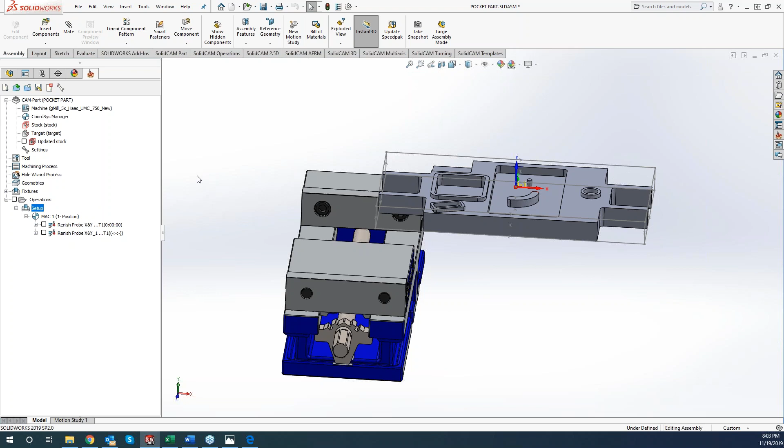But okay, so tonight we are covering everything that you guys could possibly want to know about pocketing. So we are going to go over some of the new features that are in 2019 with pocketing. We're going to cover pretty much every little option inside of pocketing that is relevant to you guys. There are some functionalities inside of pocketing that hardly ever get used. So we may still cover those, but just want to cover the stuff that you guys are going to run across most commonly when you guys are using SolidCAM and programming with pocketing.

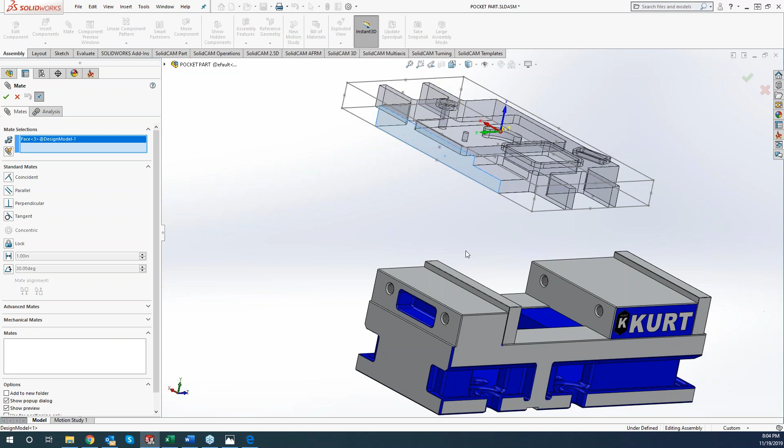So first thing I want to start off with, I did get a couple comments about setting up vises and stuff like that. So for every night class going forward, I'll just go through a quick vise setup. So in here I do have a Kurt vise, which is not mated. So I'm just going to come in here and we'll do some quick mates. And mate this to this other vise here. Go to the, whoop, I'm getting ahead of myself here. Bottom of the part to the top of the vise.

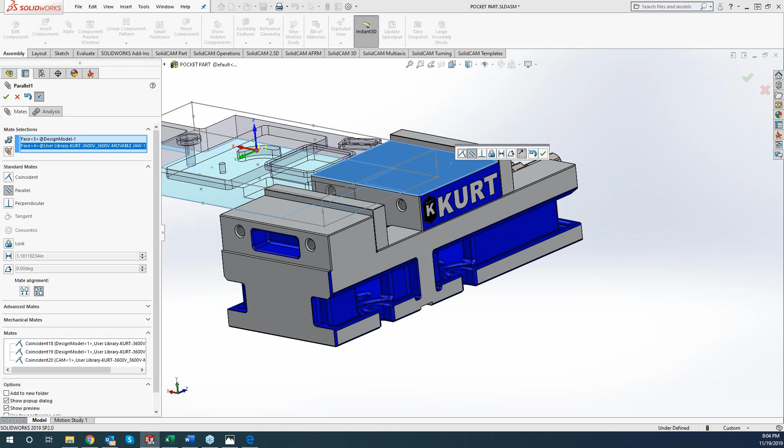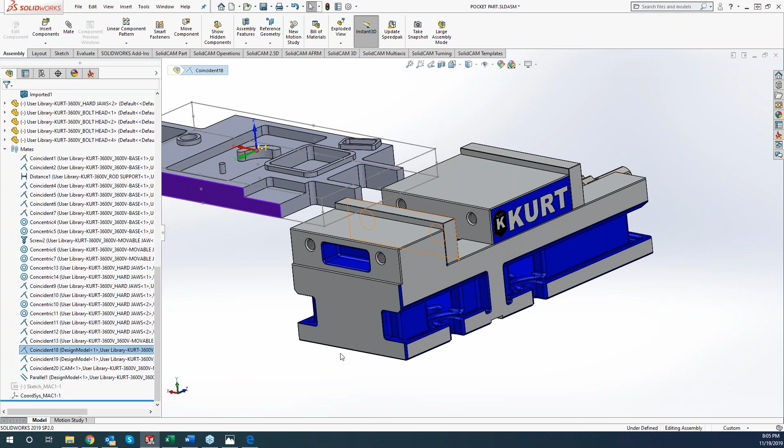Wait a minute, what do we got going on here? I'm gonna have to start all over here. Something so simple. All right, let's get back over to our mates here. Okay, got that one, that one, that one. All else fails, hit the undo button. Okay, so we'll start over here.

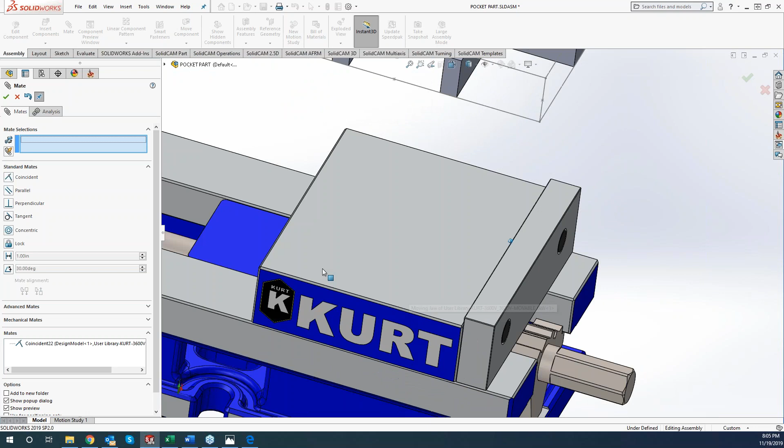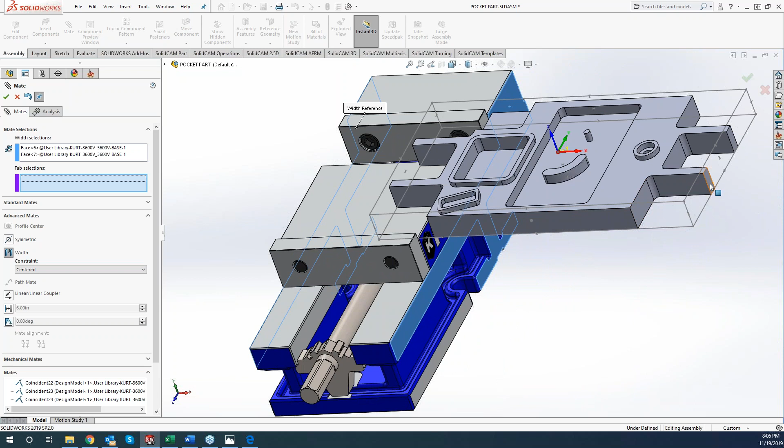So mate this face to this vise right here. And this jaw to the back of the part. We'll just set the part on that there. And we'll do a width mate to center up. Okay, there we go. So now we have our vise in there. This is completely optional for everyone, but I do like to see them in there. And by looking at everything, looks like a lot of you guys like to see those in there as well. So we got our vise in there.

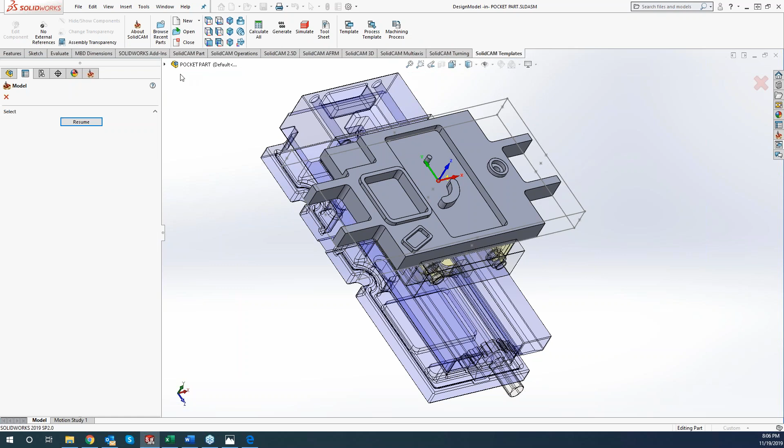Now, very first thing before we start anything is we want to get our setup going. So in our setup, it should be automatically put in there for you. So all you have to do is just double click on it. And I don't have a fixture right now, so I can just hit these little 3 buttons right here, and this will add a new vise in there. And I have several components of this vise. So what I can do is actually click on CAD selection, and then I can highlight everything to my vise here, and then just do resume. And all the components will be grabbed.

All right, so we have our vise in there. I'm gonna make sure that my vise is positioned where I want it for our machine sim. You'll see right now, I got my vise sitting into my platter, so I'll go ahead and raise this up. I'm just raising this up using my center mouse wheel. I can go in there and type a number too.

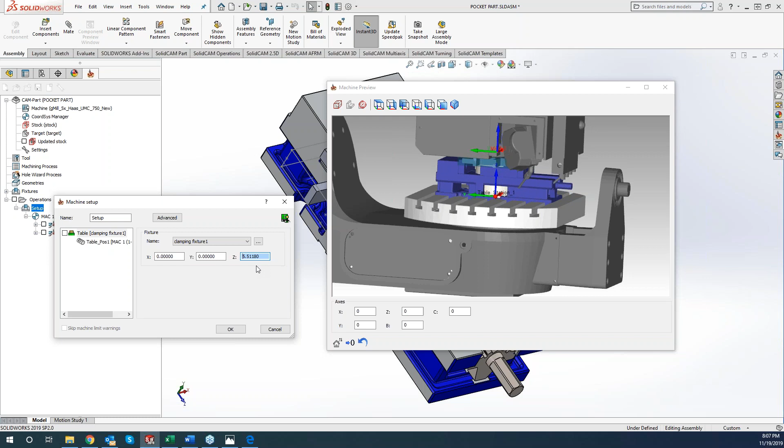Okay, so now we're good. So I got my vise in there, got it located where we want. I probed my X and Y and my Z location right here. So now we can start doing our programming. So the big things that I want to really stress with the pocketing is the smart face technology.

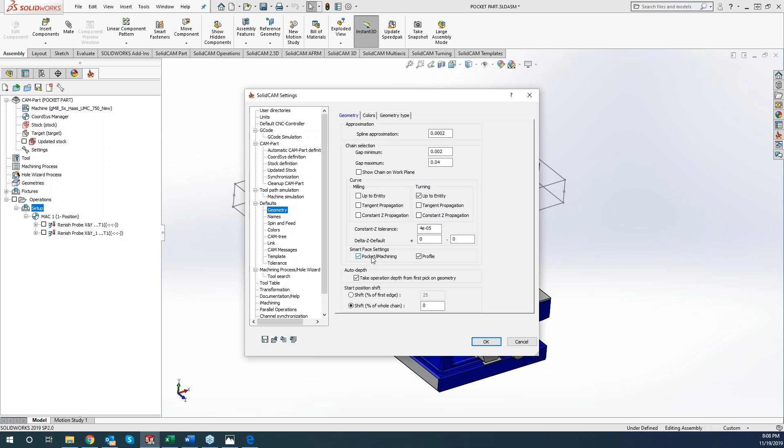Now this should be turned on by default in your settings, but if you guys want to double check, you guys can go to Tools, SolidCAM, and SolidCAM settings. And go down to geometry, and right here is the smart face settings. Make sure this is turned on for your pocketing. This will really help you out, and I'll kind of show you that here. You can do this for profile as well, but if you have that unchecked, I would definitely check it.

So on our 2.5D tab, we'll go ahead and grab our pocket. Now traditionally, I think in 2017 and older, any pockets that were set to different depths would have to be created in a separate operation. Now we have the ability to grab multiple different depths inside here. So starting at the top, we'll go with our geometry. So we want to grab new geometry, so we can hit the new piece of paper.

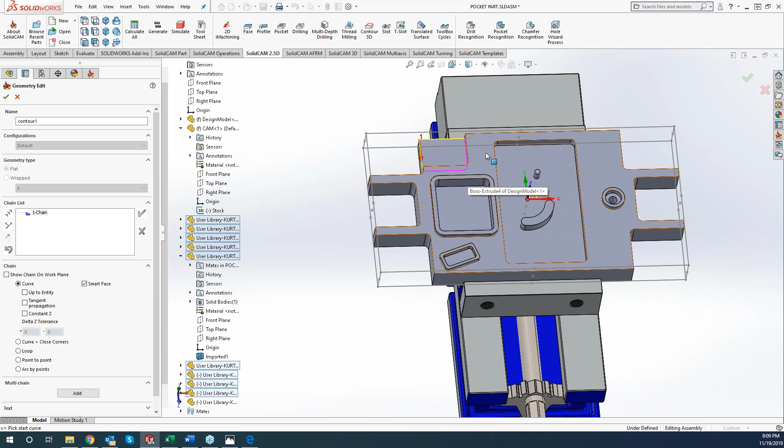And let's just say we want to pocket out this piece, and let's just do the top. And we'll use a fairly large end mill. What we'll do is it will look at anything that is open. So these outside areas right here, these open pockets, it will automatically mark those as open. But then when we have a closed pocket, like on this particular one right here, we have a semi-open. These walls are set to close, and these walls are set to open. What this is telling the software is to have the end mill approach from the outside, working its way up to this area.

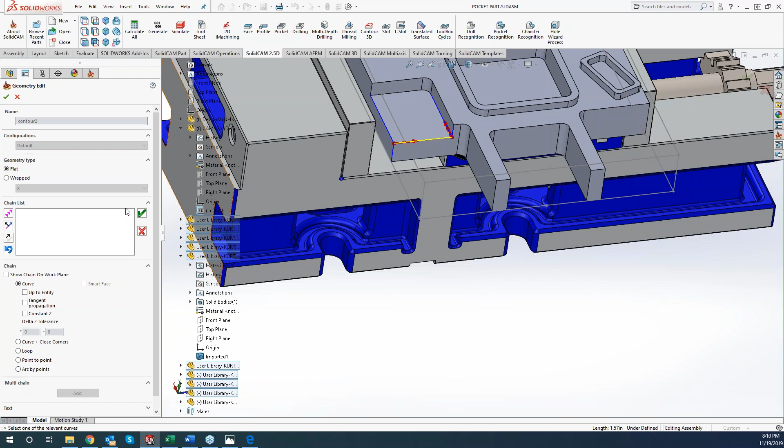So we can hit a green check mark once we're happy with our geometry. And I did forget to say that, if you don't like using the smart face or you don't want to click on the face, you guys can come in here and manually click and add chains like any other functionality that we were talking about in profile last week. So you do have the option to do that as well. Okay, so we got our geometry, and we're working on MAC 1, position 1, which is our only one in there. If you guys did have multiple you can grab the different MACs or different positions in here.

Now, we do have the option to do 3D model gouge protection. To me, I haven't had to use this much, but what you can do is you can do a 3D model gouge protection against this model, or you can actually select a different target model, possibly like a configuration inside SolidWorks. You have quite a few different options right there to do your gouge protection. And if you guys do turn that on, you will get the gouge protection offset. And what this will do is you can define a value by which the tool is moved away from the machining surface. So it's kind of like a surface offset to give you a little bit more control of your tool path.

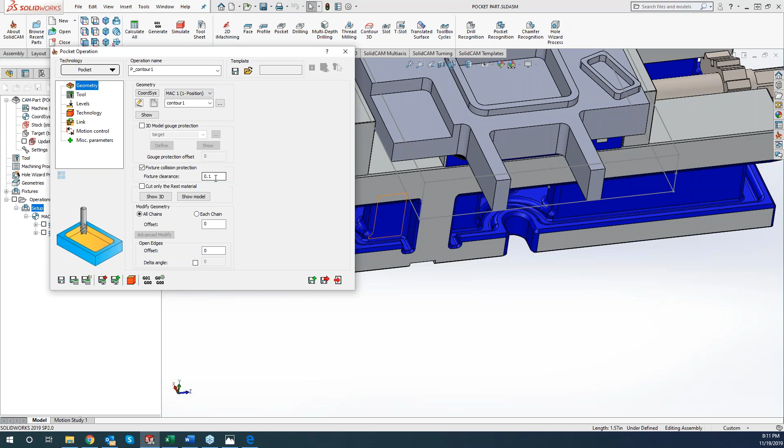Fixture protection. If you're running a fixture, you can turn this on, and what it will do is it will keep my tool path away from that fixture by 100 thou, as it sits right now. Now you can make this whatever number you'd like, but this is just if you have a fixture in the way, and not so much a fixture, if you are using toe clamps, bolts, anything like that, you can use that as a fixture, and you can do a protection against that. So really cool, really nice to have. If we were machining the outside perimeter, it will actually go and avoid this jaw on the front and the back to stay away by whatever distance that you specify there.

Cut only rest material, meaning remaining stock, which we'll cover shortly. If we have a radius of 0.2 but we're using a 1/2 inch end mill, we're still going to have some material left over in that corner. So we can turn on that cut only remaining stock or rest material option, and the next size smaller end mill will come in and nibble out those corners without running through the entire operation and cutting air.

Let's see where we're at. Modify geometry: if I want to change up my geometry, I can modify individual chains. So I can go to my advanced modify, and if I want to offset out chains or offset open edges, I can change the chain direction right here. We can come in here. Yep, that's it. So we can change offset per chain.

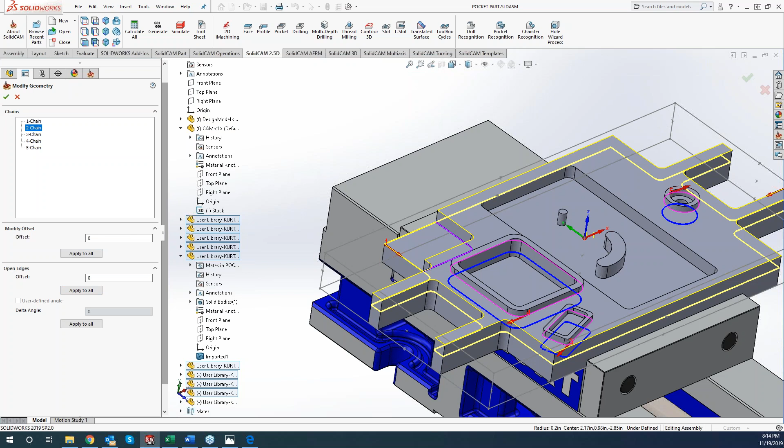And then if we do have all chains, if we do have open edges, when I have each individual chain here, my open edge offset is grayed out because I have control over each chain. But if I go to all chains, then I can just do an offset of, say, 0.1, 100 thou. So I want that toolpath to go out 100 thou past on any open edge. And then we can put a delta angle in there as well.

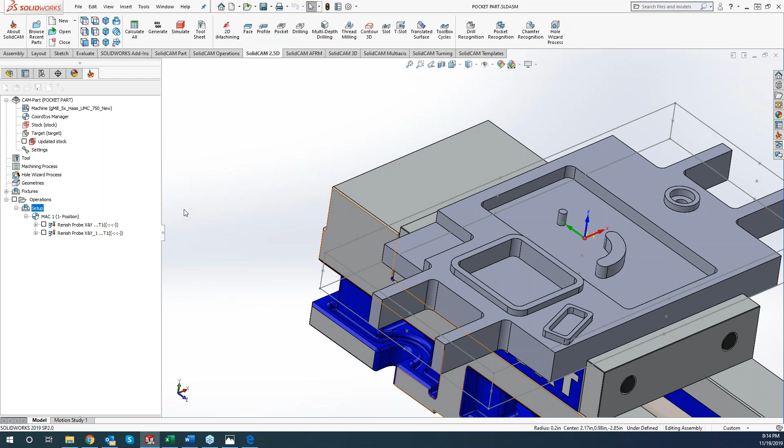Tool is kind of self-explanatory, just grabbing your tool, like what we covered in the tool library class. For this one we'll go ahead and grab... size radius. So we can grab like a 3/8 inch end mill here. Well, actually we'll go with a 1/2 inch, so we got some rest material.

And we can go ahead and throw a holder on here. Sorry guys, my holders take a second because I have so many in here. Okay, so we are running a 1/2 inch, short, and we'll have to push that up in the holder a little bit. So we'll do 1.5 -- okay, that looks a little bit more realistic.

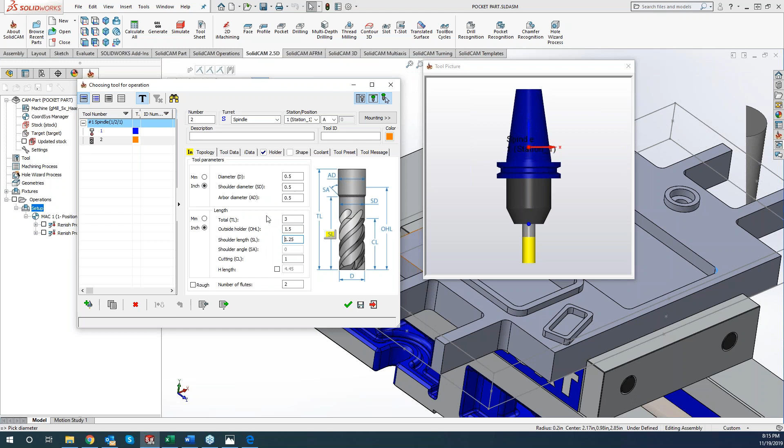Feeds and speeds are whatever you guys would like. Coolant, if you guys are using air blast or flood, sky's the limit on what you guys can do there.

Levels. Since we are running multiple different levels now, let me turn this off. So the distance from here to the top is 0.59, and then we told it we want to machine this face to this face, which is 0.2. So we have multiple different levels going on here.

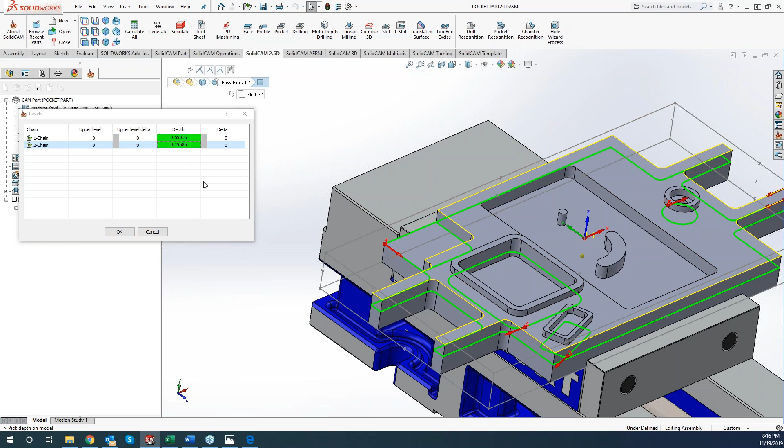In older versions of SolidCAM, you'd have to do this as individual operations, but now we have variable level. So I can click on variable level, and my chain 1 is right here -- I click on that and make it associative by turning it green. Chain 2 is going to be this level right here, at 196. We hit OK, and now it will automatically go down to that level for that geometry, and this level for this one. Now if I'd like, I can set up step downs. If you want to take it all in one cut, just put this right at 0, and it will take it all in one cut.

Now, technology -- like I've said with profile, this is kind of where the guts of everything are. So how would you like your toolpath to look? We have a couple different options for pocketing: we can do a contour, we can do hatch, which is kind of like a zigzag pattern, we can do hatch plus finish, and we can do a plunging pattern. The plunging pattern works really good for any materials, but especially harder materials, since we can always drill faster than we can machine or side mill.

If you have a spade drill or something like that, we can plunge through and get the bulk of the material out, then come in and do a profile operation. So you do have that option right there.

For this particular one, we'll go ahead and do a contour. Now when I pick my technology, as soon as I click on contour, it will automatically open up the contour tab. If I switch over to hatch, this tab will automatically switch over to hatch. So keep an eye on that, it will stay contained to what you're looking for.

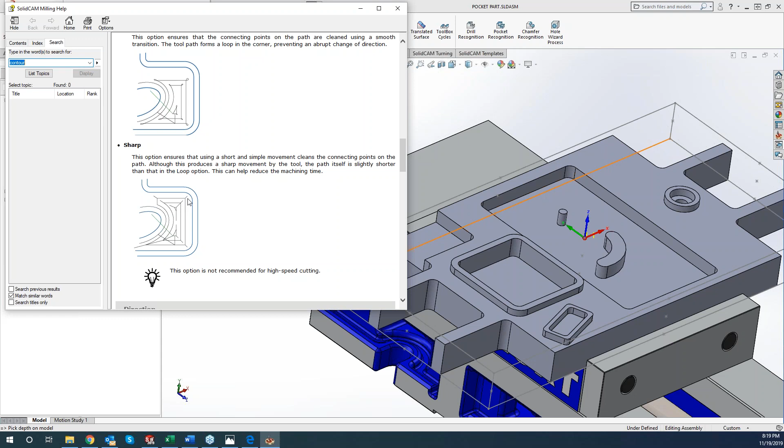Let me see if I can get a bigger picture for everyone. So we've got loops right here, which does little looping circles. And then we also have sharp, so it will come in there and do a real sharp edge, or we can set it to none and it will just follow the contour of the geometry itself. For this particular one, we'll just do none.

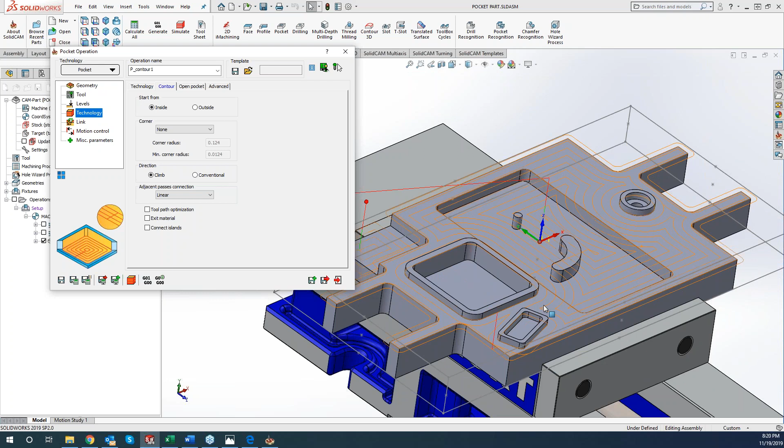Climb cut, conventional cut, and then adjacent passes. So when it goes to step over, let me just save and calculate this, and I'll show you what I'm getting at here. Our connections right here - as we move over to expand our pocket out, how do we want it to go to the next step over?

Do we want to do a linear? We can set it to smooth, so we'll do like a little S pattern in here, which will give you a bit of a smoother finish and look. Or do we want to do a rounded? Let's calculate - this will do a little bit smaller of an S pattern going in here.

So, any questions so far? Are we looking good, guys? Okay, nothing in the questions panel right now. Am I missing anything, Greg? I think towards the end I'm going to want you to circle back on something, but we'll continue with the flow for now. That always scares me.

Toolpath optimization will only work for specific operations. It will avoid doing tool plunges on stock when finishing, avoid uncontrolled tool load when cutting in corners, and also eliminate air cutting when working in tight corners or tight areas. You can have this turned on by default to eliminate all those issues and help optimize your toolpath a little bit.

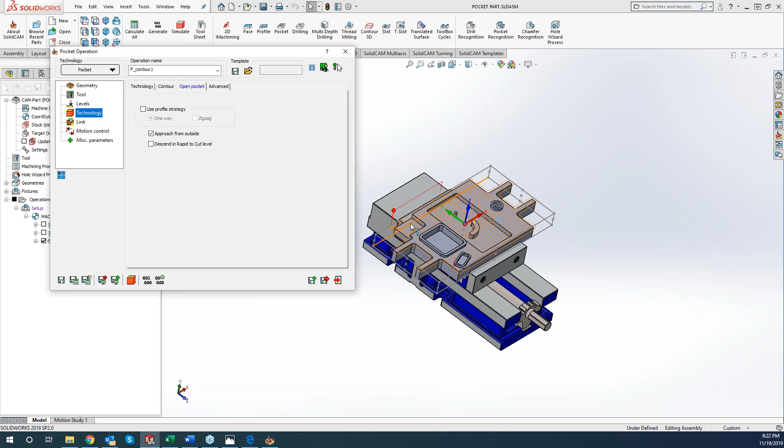Now on this top, it's an open pocket, so it's still going to approach from outside, which is what we're looking for here. Now if we're coming into a blind pocket like this one right here, we'll do a helical entry.

And then the profile strategy, you can turn this on to set up to do one way or zigzag. The Advanced tab is kind of the same thing as what we went through in profile - we can set up different sorting, set up final cuts, do wall drafts, and do trochoidal cutting in there as well.

And then the plunge cutting - for some reason they have plunge in here and in the technology section. So if you guys are looking to do plunge milling, just come over to the technology section.

Okay, now on the main technology section page, we've got contour. We specified how everything we want to be with our contour. This is how much we're going to overlap on our end mill, so we're doing 50% overlap. We're not doing any rest material. We're leaving 0 on the wall, 0 on the floor, and 0 as an island, so it's going to basically machine it right up to size.

Now, if you're looking for a really tight tolerance, what we can do is set up a 5 thou wall offset, and we can tell it that we would like to finish the wall. Do we want to do one finish pass, or we can do 2 finish passes, also called a spring pass? So you do have that option right there.

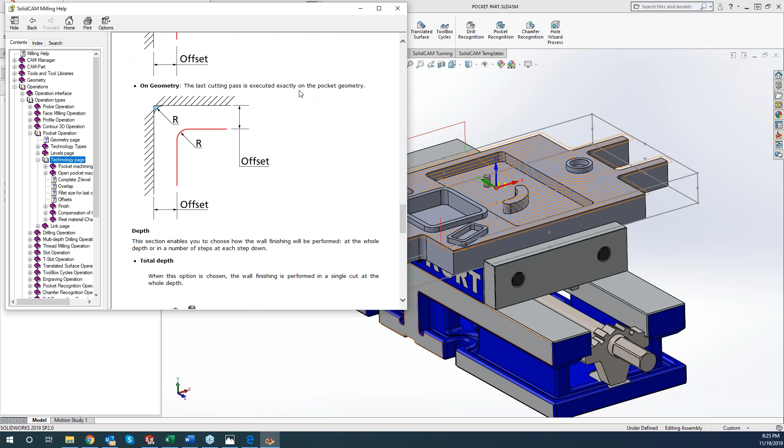So if we use the offset feature, it will stay farther away from that sharp corner, versus if we did on geometry, it would go right up to the radius there. It's not one I've actually ever used, but the option is there for you.

Now, depth type. If we have multiple pockets that are requiring roughing and finishing, what we can do is tell it to finish to total depth. So the depth, let me start over - do we want to do a finish pass on the total depth, or if we are doing step downs, it will finish each step down as it goes through.

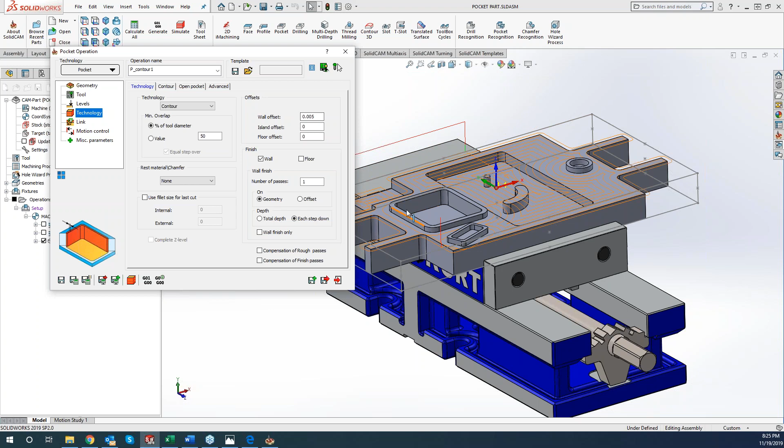So like right here, we have a 5 thou wall offset, and if we were doing step downs of like 100 thou, it would rough it that 100 thou down, leaving the wall offset on there, and then do its finish pass. Then it would move down to the next level, finish that roughing pass, and then take that one last finish final cut. So you do have that option there.

If you're looking just to do a wall finish only, you do have that option right here. And then do we want to turn cutter comp on for our roughing passes or our finishing passes as well?

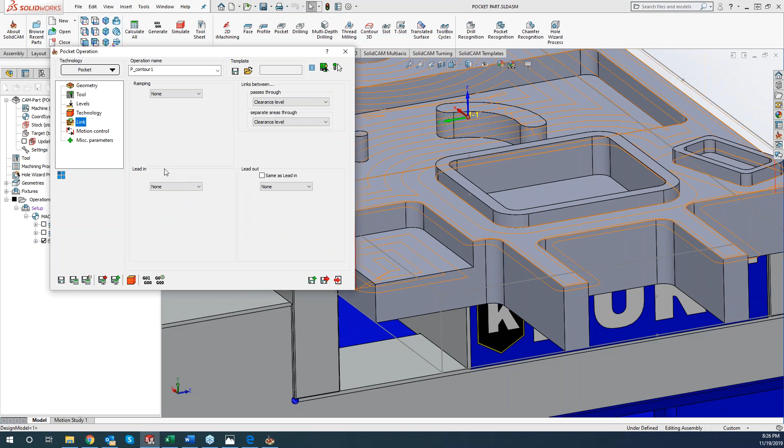All right, in the link section, how do we want to come into that material? So right now, since we have both of these as an open pocket or a semi-open pocket, it's starting from the outside. So I'm not really too concerned about ramping into the material, but once we get into this blind hole, we'll choose some different options.

And then, of course, you guys have the lead in and lead out right here if you would like to add an arc into the material. But like I said, since we're cutting with an open pocket, it's starting from the outside and working its way in. Now, if you guys are using cutter comp, you will definitely want to have that lead in turned on to have enough time for the machine to turn on your cutter comp.

If you don't, you may get the alarm on your machine where it doesn't have enough room to turn on cutter comp or an arc fitting. Greg, what's the error that we're getting on the controller?

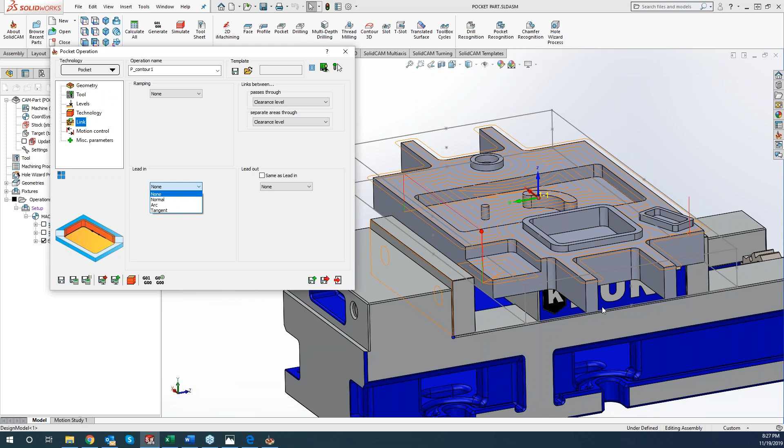The errors are different from machine to machine, but essentially you want to come in on a linear move as opposed to an arcing move. So just keep an eye on how that tool is entering that pocket. As we can see on the screen here, both operations look to be coming in on a linear move, so it wouldn't be that big of a deal.

But if you do find yourself, let's say, helically ramping in or arcing into those pockets, just make sure you have a little bit of a linear move beforehand to get that cutter comp on, right? Yep. Okay, links between passes - if we, in between passes, are just kind of doing a single line geometry, do I want it to come up to the clearance level?

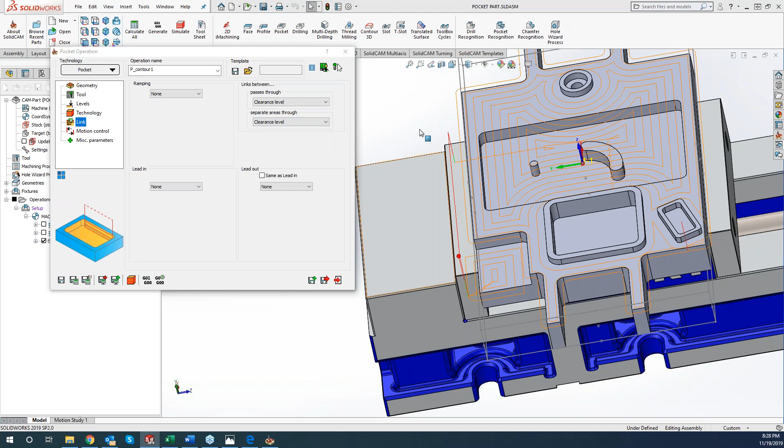We have safety distance from upper level, safety distance from current toolpath, and the level of the current toolpath. So if you guys are going through passes, you have the option right there to change up how high your tool goes up. And then to separate areas, so when we're going from this pocket region over to this one, right now it's set to clearance. So as I move this around, you'll see from this back pocket to this top, it's coming up to the clearance level.

So if we want to change it up to the safety, save and calculate, it's only going to go up my safety distance, which is my 78 thou. So if you want to save a little bit of time, not going all the way up, but just make sure you're not going to wipe out any fixtures or toe clamps. It has been done before.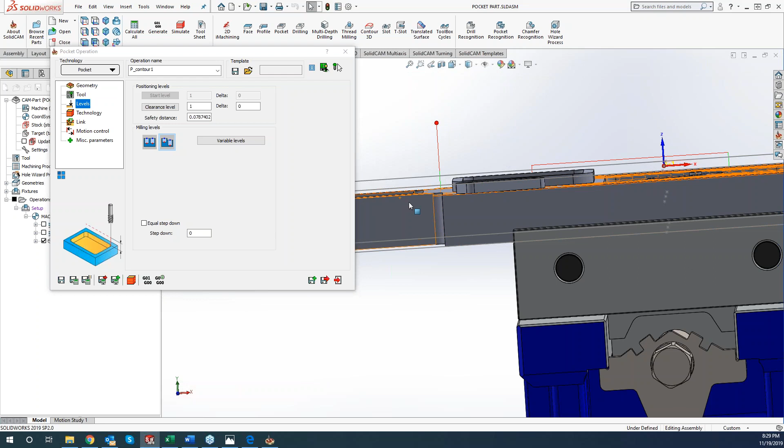Hey, Kevin. Ronnie had a question about on what move does the cutter comp turn on for these pocketing passes? Ooh, actually, did I even turn on cutter comp? Turn this on. So to answer Ronnie's question, if you're turning cutter comp on for the roughing passes, it's going to be the first move after the rapid. If you're turning it on for the finish pass, then you're going to get all the pocketing moves. And then when it comes in for that first initial pass for the finishing pass, it's going to come in on the first move of that finish pass. That's why it's imperative to have a linear move for those first passes.

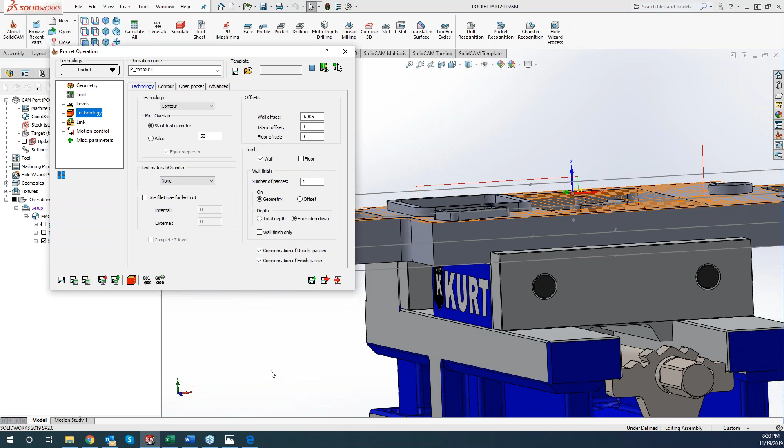And for some reason, I cannot give you a G-code right now, Ronnie, to show you. It's like my notepad died. Note to self, don't let Windows do an update before a night class starts. My Skype died out on me, and now my notepad died out on me. Okay. Oh, sorry, Ronnie, I can show you in the actual. Ronnie, did that answer your question? He's still processing it, so I think we'll move on for right now. We can circle back if he still has questions.

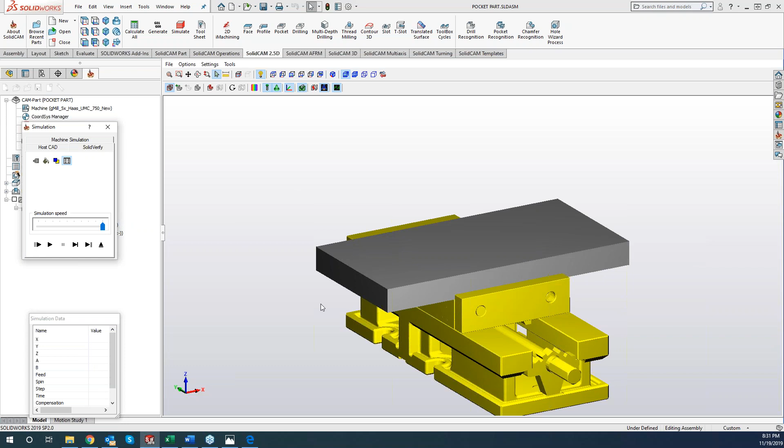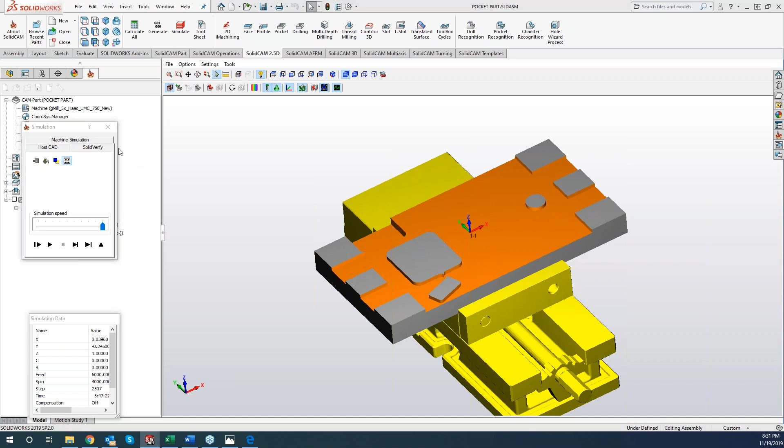And I'm going to switch over to SolidVerify so we can just kind of see what we've done so far. Okay, so since we have our fixture set up in here, our fixture showing, if we go and hit the play button here, we can see exactly what's going on. So what it did is, something I can't rotate here. There we go. So what it did is came in there and machined everything off. Now, normally we would already profile the outside out. So let me just switch this up real quick.

This is kind of a good example because I know a lot of people don't use the stock, the extruded boundary, very often. So we'll go ahead and just grab extruded boundary. And then when it's looking for extruded boundary, all you have to do is just chain the outside of your part. And this will treat it as an extrusion, per se. Now we'll go to simulate.

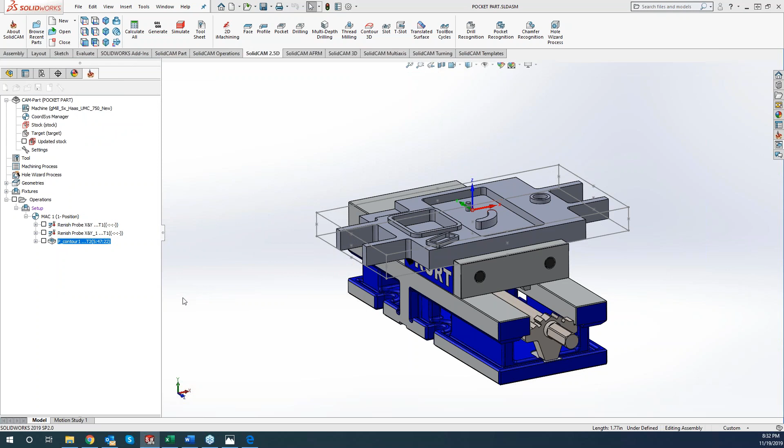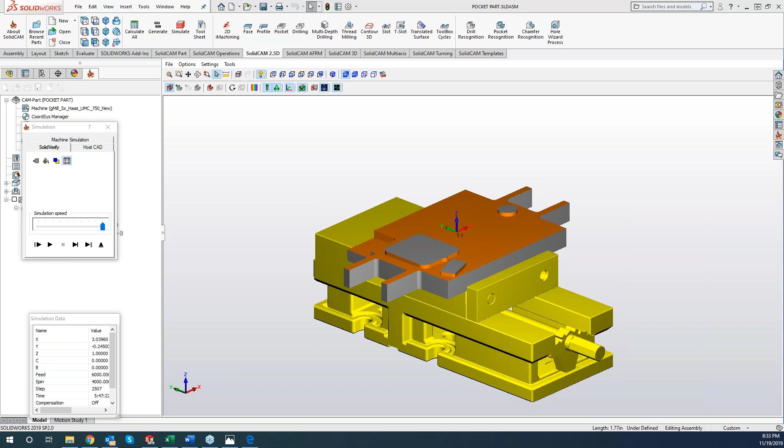Okay, it looks like what Ronnie was wanting clarification on was the type of motion that the compensation's turned on. We didn't clarify whether that was going to be a G00 move or a G01 move. That's going to be on the initial non-rapid move. So it can be turned on the G01, a G02, or a G03. You want it to turn on the G01. That's why it's imperative that we have that linear move in the beginning, because you don't want it turning on during an arc move. Awesome. Did a way better explanation than I could have on that one. With Ronnie's help.

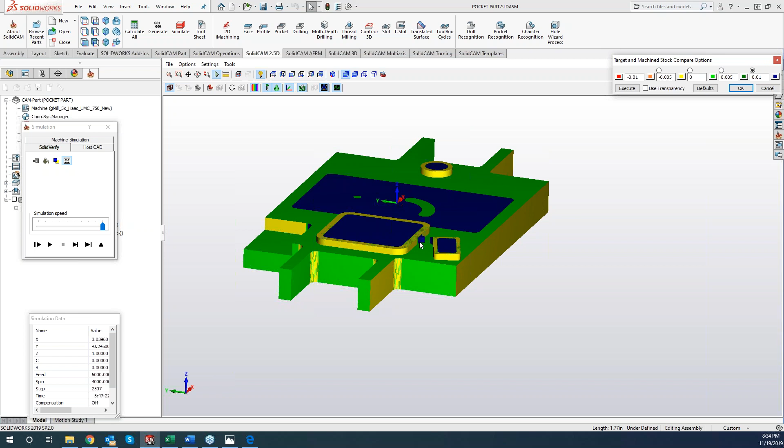Okay, so I ran it through and we cleared off all our material up there. We can do a stock target comparison, and basically anything that is green, we're up to size. Looks like I need to do a floor finish on here because I still have some material on my floor. And looks like my 1/2-inch end mill cannot fit through here, as well as on my corner right here, I still have material. So what we can do is tell it to finish off the floor, save and calculate, put an offset in here.

And now what I'll do is I'll make an exact copy of what I just did, and I can switch this right over to rest. My previous tool was a 1/2-inch, and I'll switch this over to a 1/4-inch.

Save and calculate. And now you'll see that 1/4-inch end mill is just coming in here and cleaning up the corners that were left out. So I had this area that was left over, as well as that area where that 1/2-inch end mill could not get through. So that's very simple on how to do the rest material there. Any questions with the rest material?

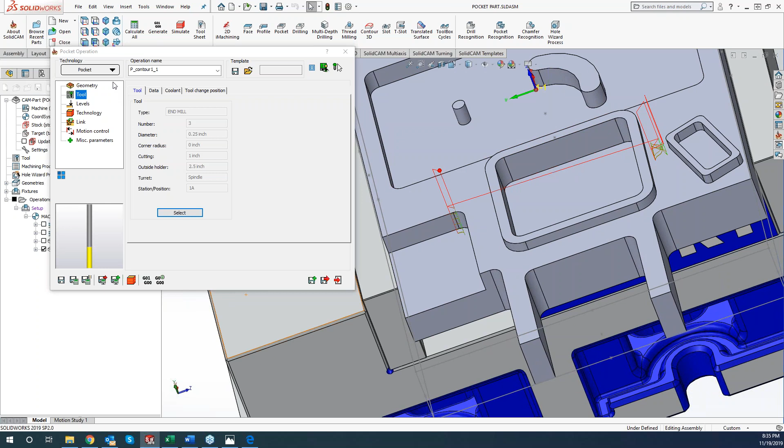Now, one thing I did forget to tell you is with the pocketing operation, new in 2019, they've added in multi-tool. So what we can do is do a multi-tool, and what I'll do is let me just delete out that second operation. We'll go back to our 1/2 inch one. And if I switch this over to multi-tool, I can tell it that, all right, I want a 1/2 inch tool in there, and I want it to finish the wall and the floor, and I would like to add a 1/4 inch in here as well.

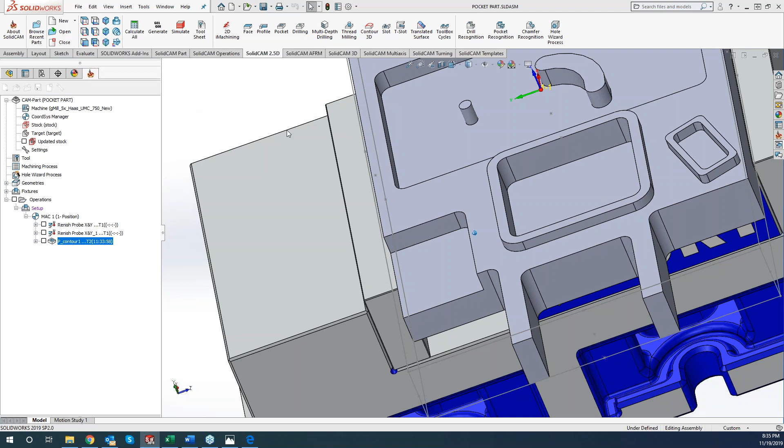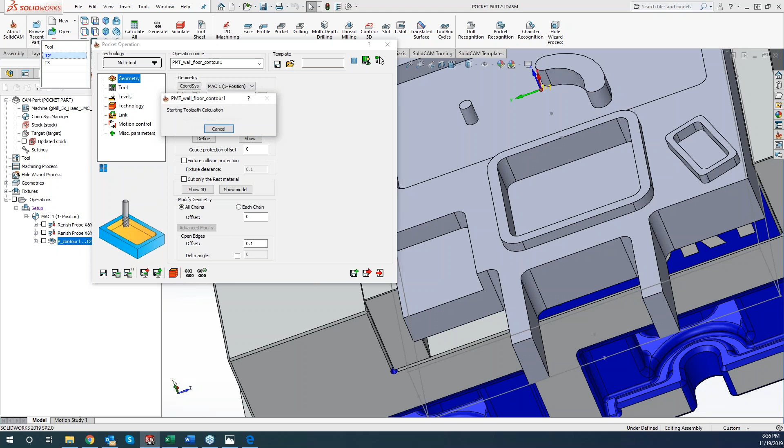And then I also want it to finish the floor and the wall there. So now, this is where we could go to our, where's my rest material? Cut only rest, save and calculate. And what it will do is it will machine it out with that 1/2 inch, and then it's going to look at the updated stock and then come back with that 1/4 inch end mill and clean out those same areas. So with this new multi-tool function here, it saved you a step of making a copy and then changing out to that smaller tool, where now you can do it all within one operation.

Now, if you want to go back between the two tools, you can just come up here, and this will give you tool number 2. This will give you tool number 3. Now, these tool number 2 and tool number 3 are actually the operation. So for my tool number 2, it created an operation right here for my 1/2 inch, and my tool number 3, it created an operation right here. So if you want to go back and forth really quickly without having to exit out of your pocket operation dialog, you can just come over here and change up the parameters.

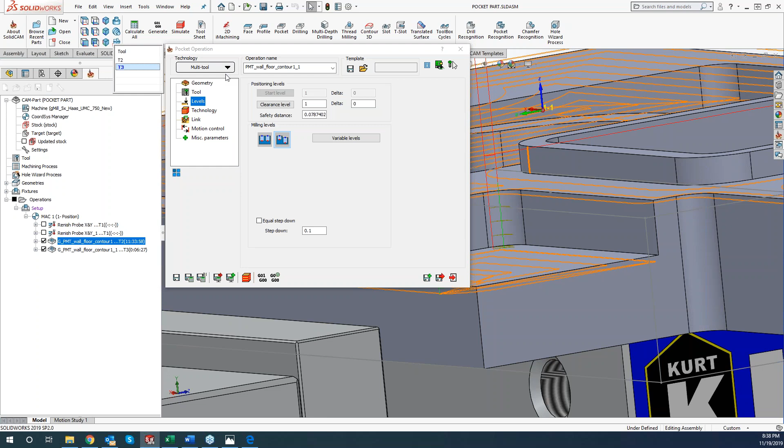So maybe with my 1/4 inch, we're running some harder material. I can't take a step down all at once. I can only do a smaller step down of 100 thou. So now if I save and calculate, we can go in here, and you can see my 100 thou step downs with my nice green puke color toolpath right there. So any questions with the rest material or using the multi-tool function? Multi-tool has really helped out a lot, making it simpler and easier for everyone, at least from what we've heard back.

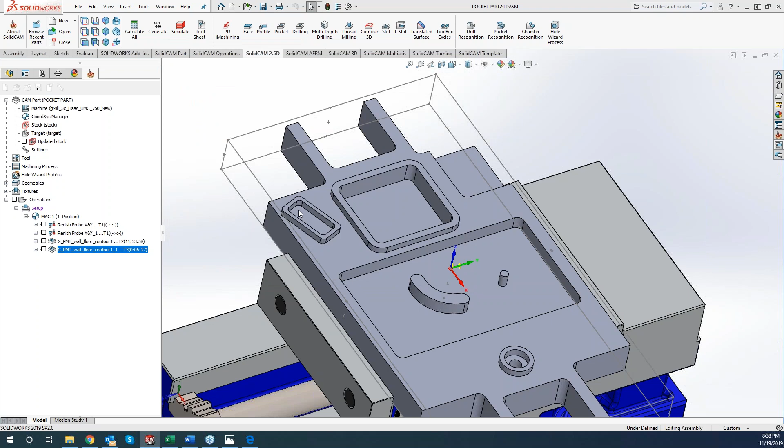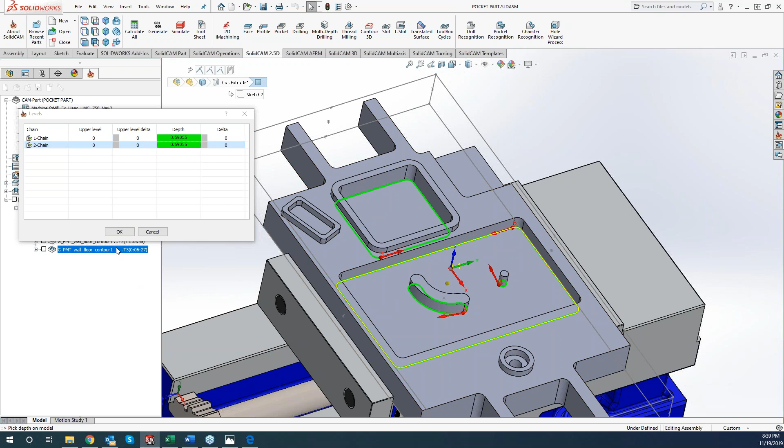Okay, so we got an inside pocket right here. So we can go ahead and do a pocket. Geometry, and I want to machine out this and this one. So you'll see by doing the smart face, it automatically recognized that these were islands, and we're going to machine around those islands. So I can come in here, and we'll go ahead and grab that 1/4 inch end mill. And levels, like we talked about before. So we can go to the variable level. 0.3, and this one is, oh, they're both at the same level, so I don't have to worry about it. So now, if I want to take it all in one cut, we can just put 0 in there, and we'll use a contour. But now, since I'm coming into a pocket without a semi-open or open face, I have a couple ramping options.

Sorry, everyone. I did on-site training all day, and now I can't talk anymore.

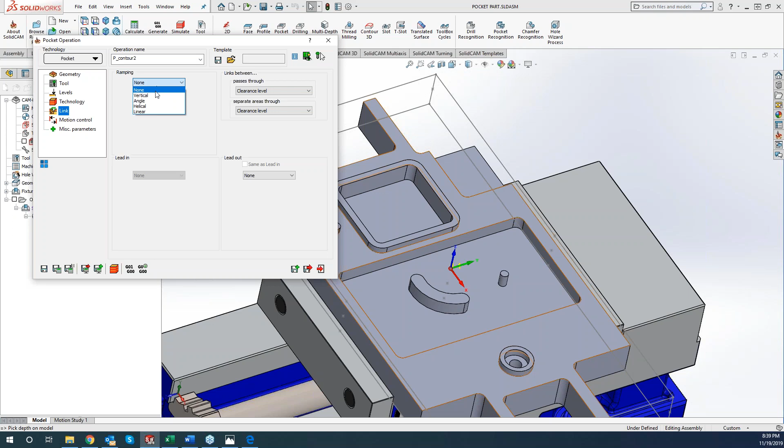Several different ramping options here. So I can do a vertical, which is basically just kind of straight up and down. I can set a point where I'd like it to vertically kind of go down. You can set it up as an angle, and we can specify how many degree angle that we want it to go, and also along with the start points. Helical, which is kind of my go-to. So it's going to do a helical entry going into there, and a linear zigzag as well. So I'm going to set it to my favorite, helical, and go ahead and save and calculate.

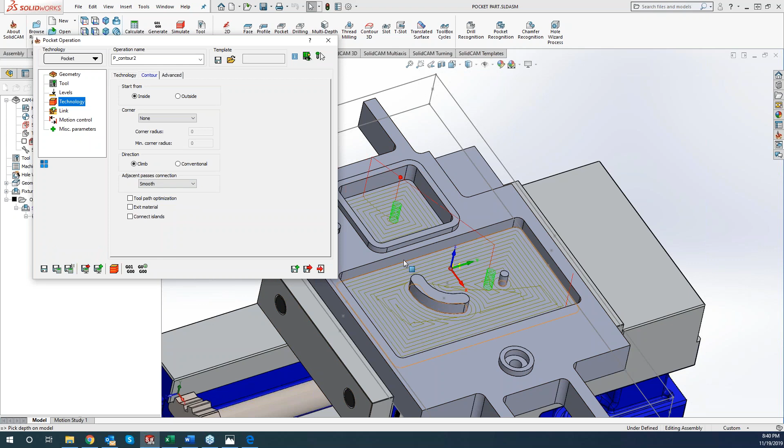So we can see that it's doing a nice helical entry coming into there, and then it starts its pocketing operation, working its way out. Now, if we're trying to smooth out things a little bit, we can go to our contour and we can set our connections to smooth, so it kind of smooths out our connection passes. If I zoom in here, got nice little connections going on right there, so the machine's not jerking. But that is a closed pocket right there.

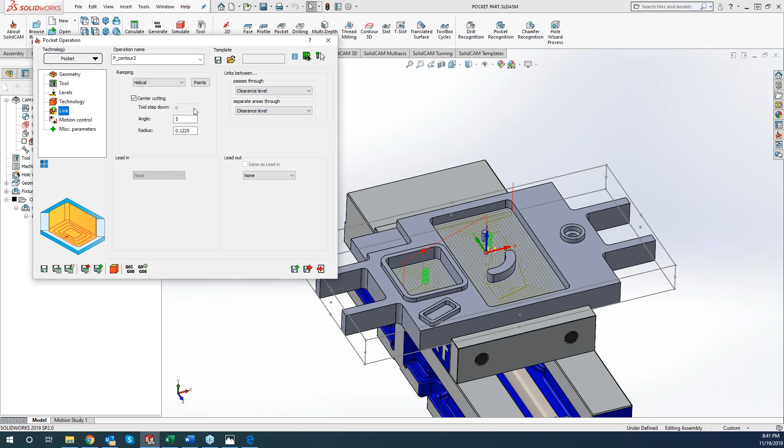Any questions with the closed pocket? Hey, Kevin, can you change the linking features, the ramping, and just show visually what each one is going to do? Sure. Kind of go through the vertical. Let's go through the angle. So let's kind of get zoomed in here.

So helical, we can see. Let's do linear. So instead of doing a helical, we're doing a zigzag pattern, working our way down, so we can set that angle and the length of the zig or the zag, however you want to say it.

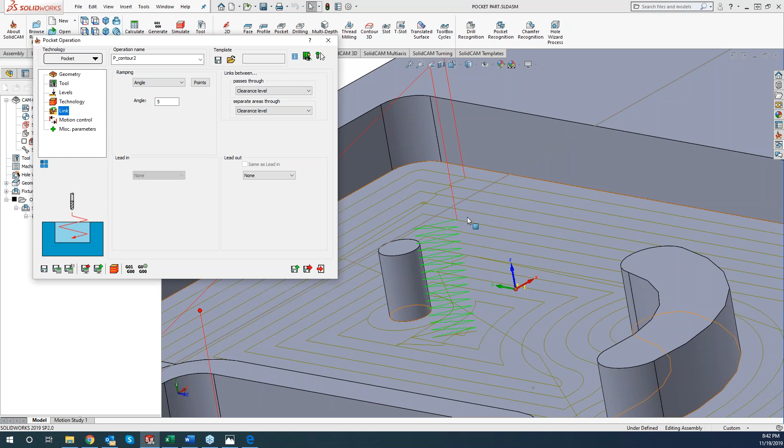Then we can go to angle, which is going to be pretty much the same thing as the linear, but with linear we can specify the length of it. And angle, we don't have that, it just goes based off of the tool size, is the distance that it's going right here. Now, like I said, if we go do a point,

zoom out here. So maybe I want it to start over here for that one. So you can see now that I told it to start over there, it's going to come over here and start the zigzag process, working its way down. Yep, and you still have that same option with linear as well.

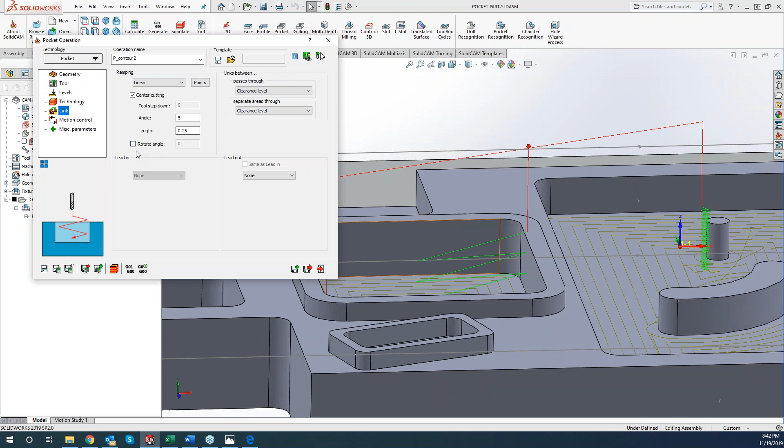Now, Ronnie's got a question about the rotate angle under the linear ramping strategy. So right now, our strategy is going 45 degrees. So if we do, let's try 180, that's not going to give us anything that we can see. Let's do 90.

And so if we do 90 degrees from the original, so if we want it to go, if we do a 45, let me get a top-down view so we can see this in action here. So you can see our line going like this. Now if I do save and calculate with 45, it's going to kick it off at a 45-degree angle.

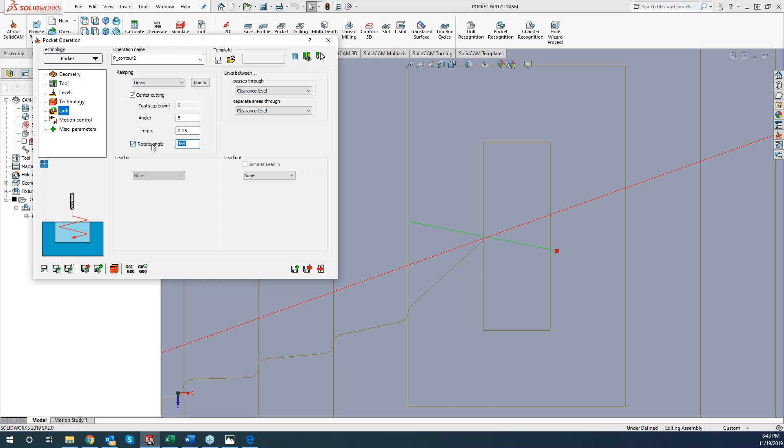So whatever value you put in there, 169. Now let's leave it. Oh, okay. Let's zoom out a little bit and let's check out the other pocket as well. So it's applying it to both chains, correct, or it's going to apply to all chains that are associated with this pocket operation. Yep. Now your points, you do have the option for each individual pocket to pick the start point there.

But if you're looking to do a zigzag strategy with this pocket and a helical with this pocket, you would have to create two separate operations. So we have no way of dissecting the ramping per pocket. It's going to be all or none. So if you have 50 pockets, all 50 of them are going to be the exact same. Does that help you out, Ronnie?

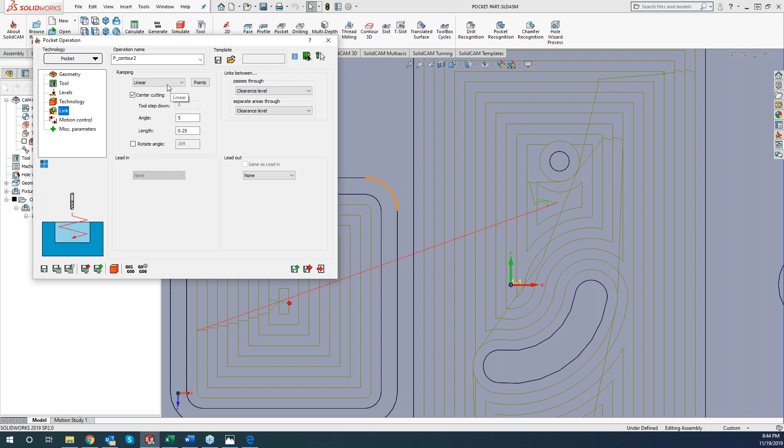And then vertical is going to be our straight down. But what we can do is, if we're just looking for a straight down and I want it to start over here, you can tell it to start there, save and calculate, and it's going to start exactly where I specified where I want it to start.

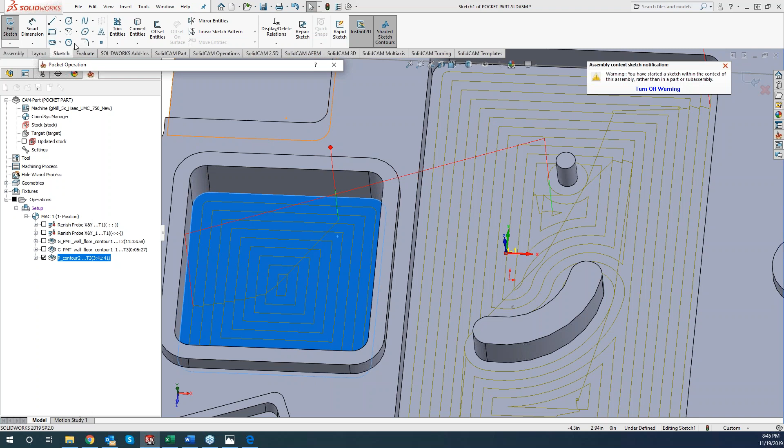So if you're looking for an exact start point, what you can do is come in here, do right click and do a sketch, and we can come in here, create a sketch point, and I can put it right there. And obviously you guys can smart dimension that.

But now, if I go off of that, now I have a physical point I can click on that you guys measured out, and now it's going to start at that exact point. So it's a great spot to do a start location and work its way over. Okay.

Trying to think. What else am I missing in pocketing, Greg? Ronnie has a question about using the chain. I'm not quite sure what that's in reference to. Hopefully we can get some clarification there. Chain. We'll have to wait for him on that one.

Yeah. So what I wanted to circle back on was, oh wait, here we go. Ronnie's answering right now. So setting the point of each pocket is by using the chain.

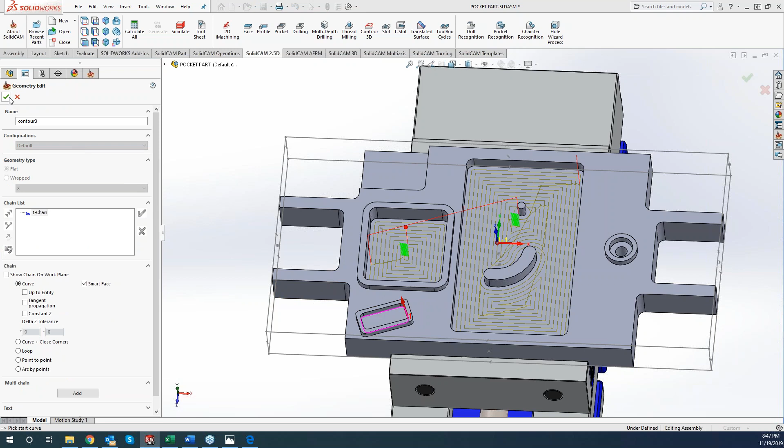Now, if I wanted to use all the same tooling, same step down, everything like there, that's carried over because I did a save and copy, but now I can go to my link and switch it over to maybe a vertical. And now it will just do a straight down drop on there. Or, if I want to do a helical, if it can fit it in there. Yeah, so I can actually fit a helical in there. So we can do an angle, save and calculate.

And now I can do an angle right there. And maybe on this one, I want an angle of 1 degree. So it does a bunch of little zigzags going down into there. So if you would like your ramping strategy to be different for each pocket, you would have to create a separate pocketing operation for that.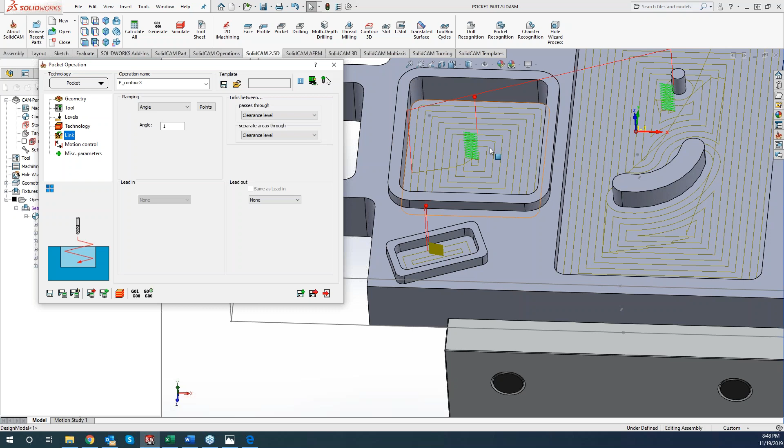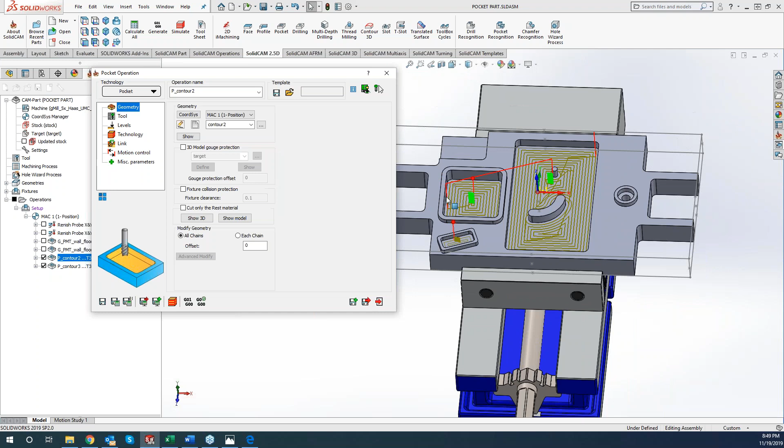Okay. All right, what were you getting at here, Greg? Yeah, the thing I wanted to circle back on was when you were talking about open pockets more towards the beginning of the class, you do have an open pocket in, I believe, the upper left-hand corner of this model, if we can zoom out a little bit. Yep, right here. Yeah, let's create a new pocketing operation just on that feature. I'd like to get a visual on changing the angle of approaches for those open sides.

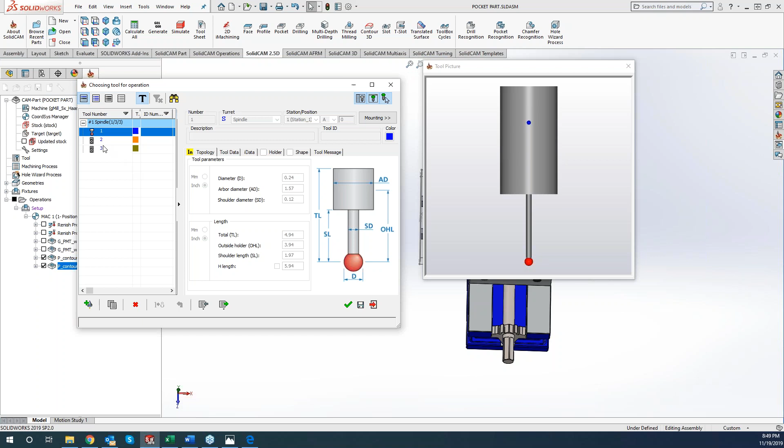By using the delta angle? Yep. Okay, so let me grab a tool here. Check all these. Okay, so let's go ahead and go to our technology contour, open pocket, approach from outside. Okay, so we're starting on the outside. And if we want to extend 100 thou past, and what would you like in there for a delta angle?

Or am I going down the wrong road here? Or did we lose Greg? You're going down the right road. I think this is good to show the visual with a delta angle of 0. And now we can go in and modify that value and show everybody how the toolpath is going to react once we change that angle.

So now we did a 45 degree, and let me take a look at this right here and more over here. So now if I turn that off, it is going to come straight in. So if I turn this on at 45 degrees, it's going to kick our toolpath. Once it goes outside our pocket, it's going to go 45 degrees out that direction.

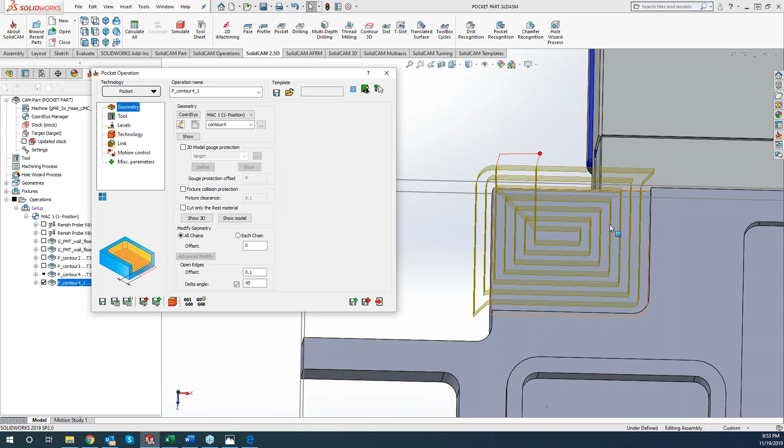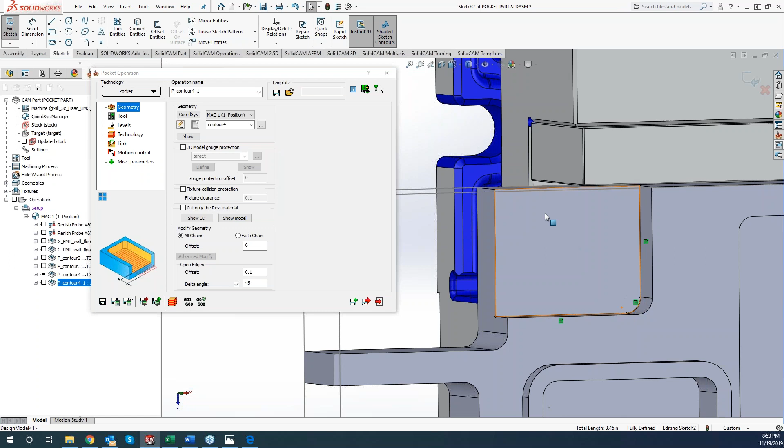So if we were looking to do that, let me just turn this off. I can come in here. We can do a sketch and do a convert. Yeah, we'll just do a convert real quick. And now, oops, normal to. Come on, mouse, work with me here. Then we can draw a sketch like this.

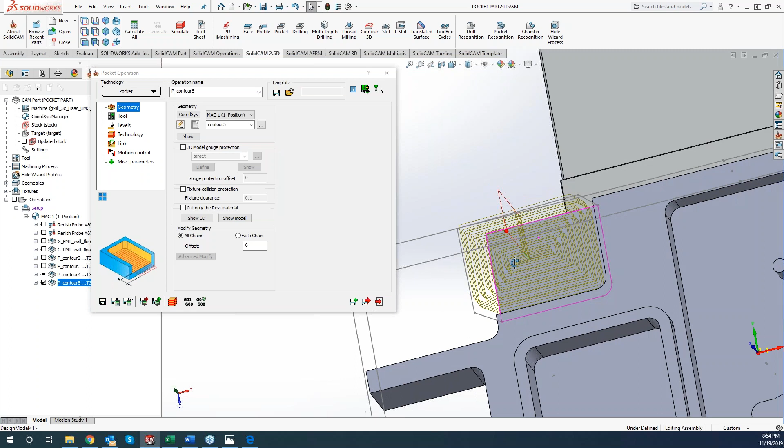Then now, if we were looking for that exact pattern or to angle in like that, we can go and grab new geometry, and we would just treat this as a closed pocket now. So we can grab that, go here, way around, and save and calculate. And now you can see we're angling towards the minus direction, so minus 45.

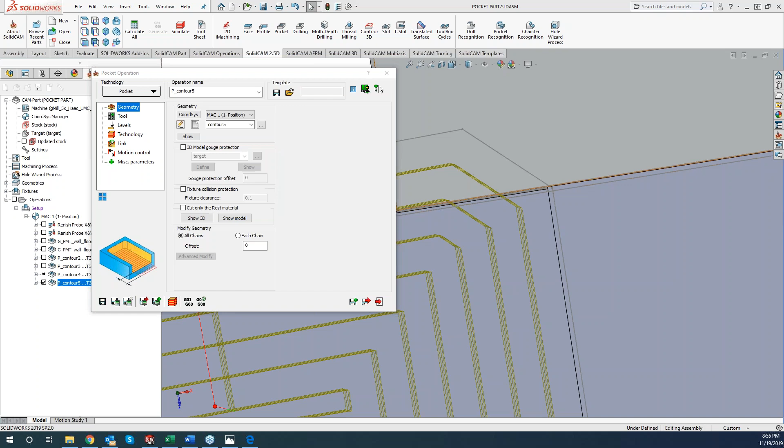Yeah, I'm really glad that you showed that, Kevin, because so often we get lulled into this belief that we have to use the features on the model to set our toolpath by. And even I forget from time to time that I have all the tools available to me in SolidWorks as well as SolidCAM to really get the toolpath that I want. So I'm glad you showed that. Yeah, it's a great point there.

So don't go off of the model. I mean, draw what you need in there. We try to incorporate everything into the operation itself. But as machinists, we're anal. We like to see our toolpath a certain way. We want it to do it that exact way. So if you can't get it that direction or can't get something in there, like Greg was saying, remember, you can just come in here and draw a quick sketch in there and it's good.

Now, any sketches I make to this model never reflect back to the original, and it only stays contained to this model right here. So yeah, it was good to show that. All right, any other questions?

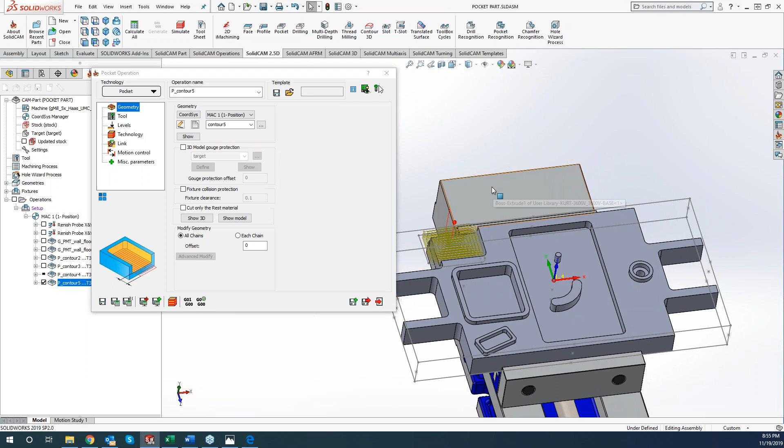Ronnie's got to have at least a couple more. I'm just kidding, Ronnie. For those of you that are new, it is a tradition that we have to pick on Ronnie.

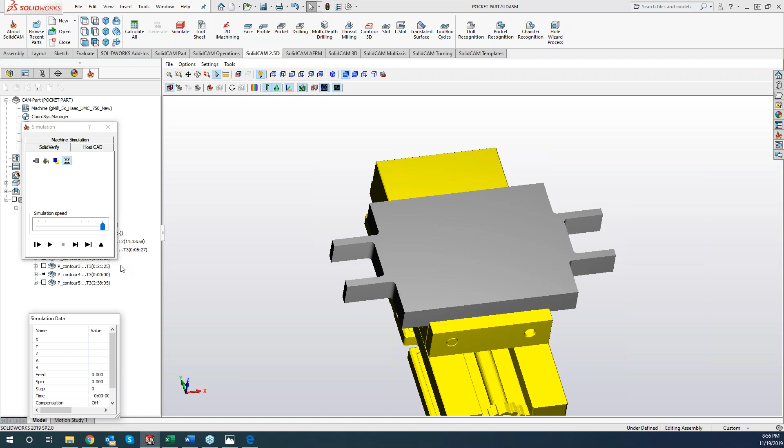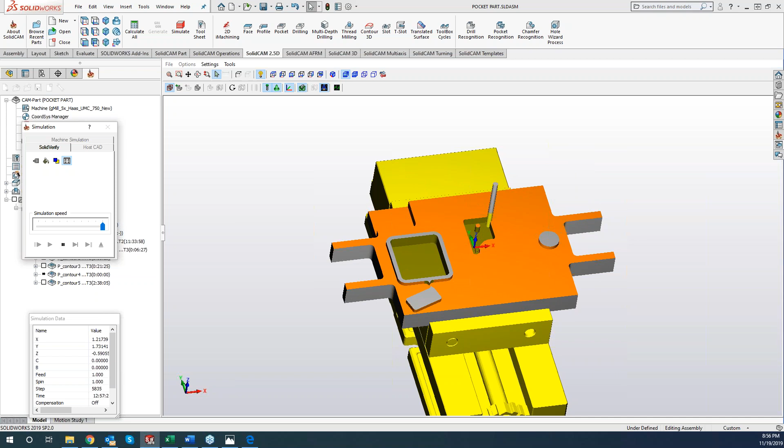Okay, so let's see what we did. So we'll go ahead and go to operations and we'll do a full simulate here. We can play this through. So we're probing up our part. Machining off the 2 different levels. It's doing the finishing here, finishing the floor and the wall. Going to pick up where that 1/2 inch is. And if we want to play this through,

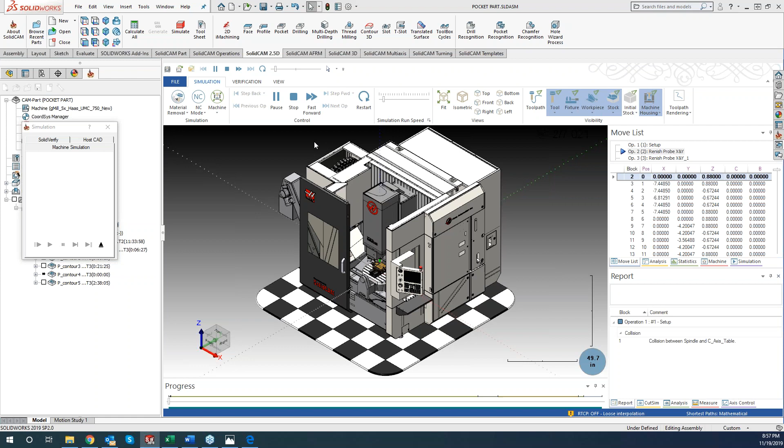we can come in here. And so we just probed up our part. And speed this up here. And we have a completely done part except for this hole right here that we can do another pocketing operation on. But I think you guys are probably sick of hearing the word pocket.

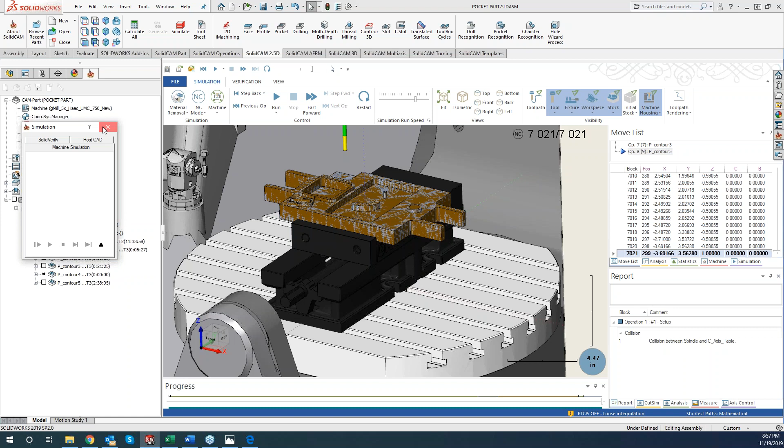But with that being said, any questions from anyone at all? Now is the time to ask. Hopefully you guys learned something, but I don't have the questions panel out. So Greg, do you see anything? There's nothing new coming in. Okay. Looks like everybody's pretty satisfied with what they saw this evening.

Well, they could be just not saying anything. Just kidding. They could be like Brian and sleeping. Yeah. Yeah, I almost did fall asleep there. Well, it's 50-50. It was either that or you were out getting beer for everybody. Yep. You know what? I just finished my beer, so you guys are more than welcome to come over.

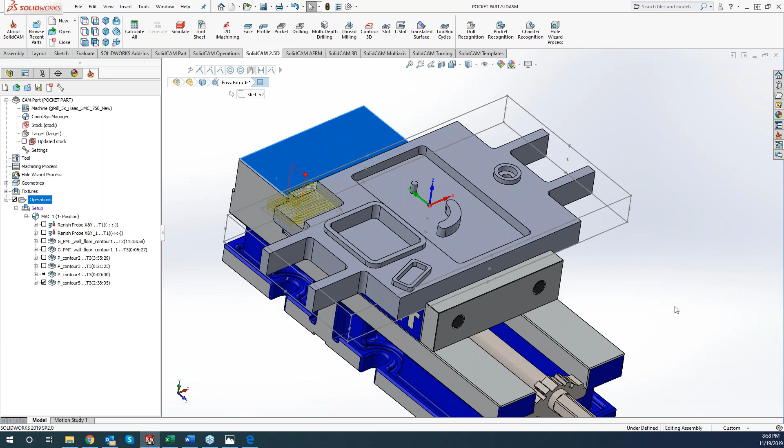Covering for next week, we are going to be doing the webinar here. The 26th, is that next week? Yes, it is. Okay. So next week we will be covering drilling, and drilling consists of a lot. So we're talking spot drilling, drilling, reaming, tapping. All that is going to be inside of the drilling operation. So we'll be going through all the ins and outs of drilling, and as non-exciting as drilling is, Greg and I will try to make it as exciting as possible for you guys. So we'll show you something cool.

Now, are you folding thread milling into that class, or are you separating out the thread milling from the drilling portion? Yep, we'll separate. We'll show it as a new feature that they added in 2019, but we'll cover the thread milling in a separate class, because there can be a lot going on in there as well.